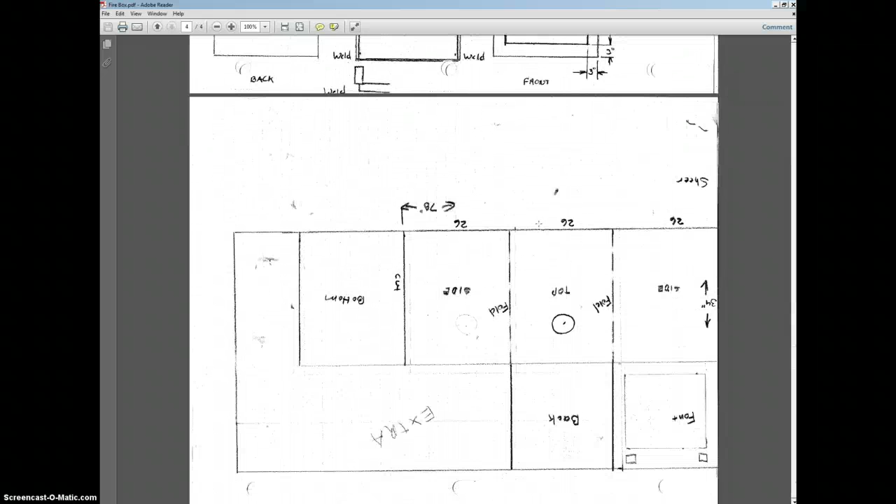For this next project, we're working on a firebox. This is something that we're making in the welding shop this year. And these are some plans that the teacher drew up. And so we're going to take these, make them into a little easier to read files, and use the geometry from a 3D model to help lay out and figure out where things need to be placed for the drawing

files. So there's some different pieces here. It's welded together. There's multiple things going on. So this is going to be a good project for introducing you to welding symbols and also for creating components inside of assembly files. Alright, so now that you know kind of what this looks like and what we're looking at, let's start to build.

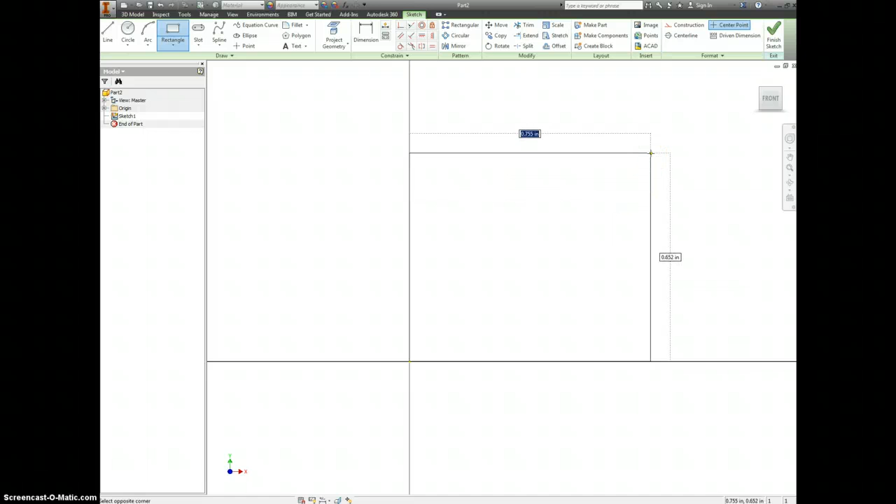We'll make the firebox first, and it's 22 by 22 by 28, and this is all 1/8 inch steel. So I'm going to drag that off to my other screen so I can see it and talk you through what I'm doing and why. So let's go to our part file. And we're making a 2D sketch. And remember, always start with your origin. We said this is going to be 22 inches by 22 inches. So we end up with a rectangle.

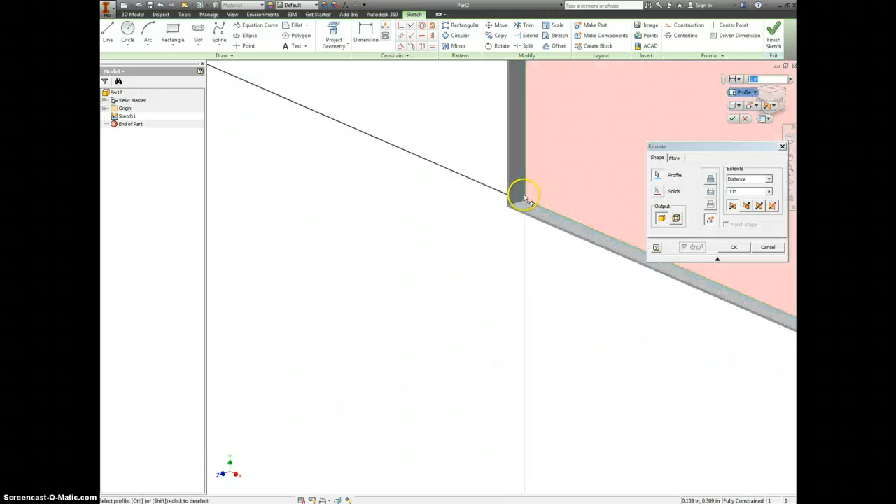So this is 1/8 inch steel, so let's offset that inside. We want these to be the finished dimensions. Alright, so the inside of the box is going to be thinner. So 1/8 inch is 0.125. We're going to extrude just that part, and it's going to be 28 inches long. Okay, easy enough so far.

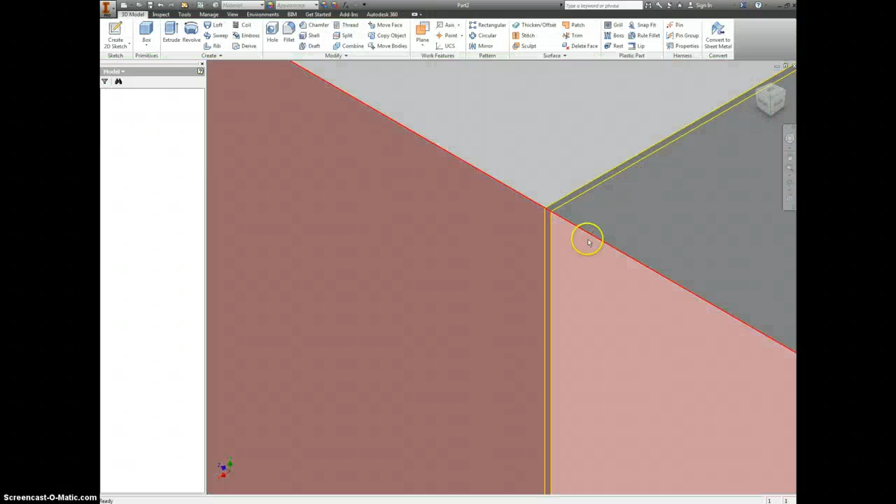We're going to put a back on this. So let's actually flip around to the back side. Right click, make a new sketch. Finish your sketch. And we're going to extrude this 0.125. We want it to go in instead of out, so flip your arrow around. It's still adding material, so that's good. Alright, now we're left with just a box.

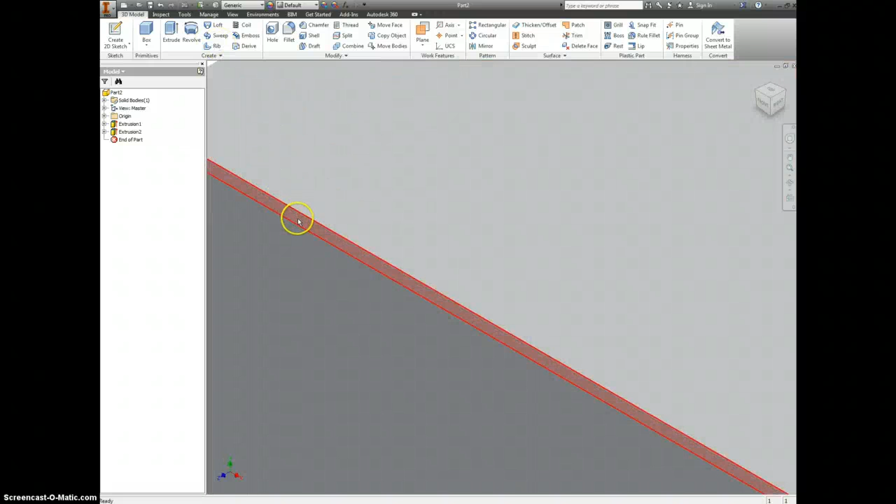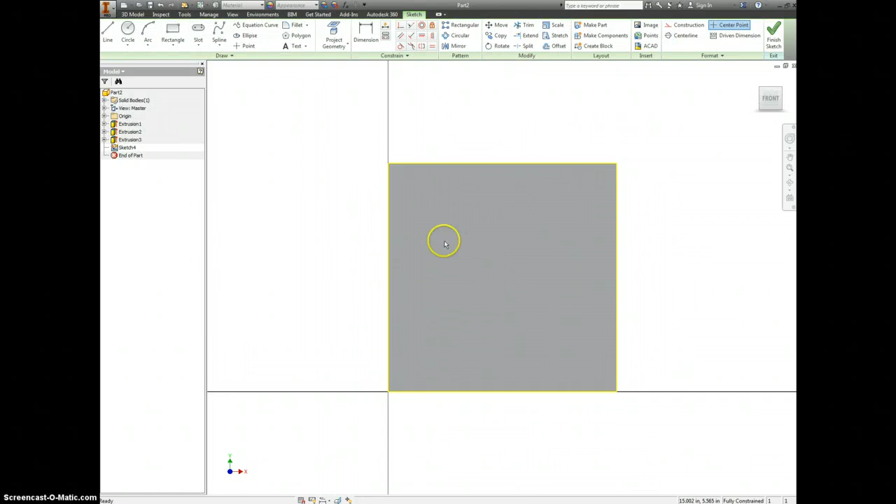Okay, the box does have a front face on it as well. Let's finish that and extrude 0.125. We want it to be pushed in instead of out. Now this is completely hollow. Alright, on the front of this, we want to make a new sketch. It's going to have like a little flange here for the door. I can show you that on the picture as well. So this is what we're looking at now.

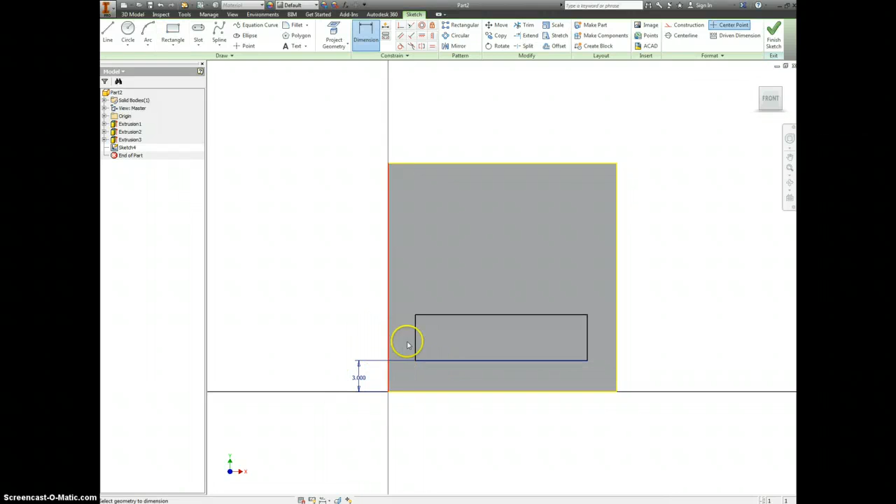It says it's going to be 3 inches off from the bottom, 3 inches over from the side, and that's going to be on either side. So there's our 3. There's another 3, and 3 from this side as well. I should probably zoom in to check and make sure that I'm getting the correct line to dimension to. And maybe you should as well. Let's make sure you're going to the outside line and not to anything else.

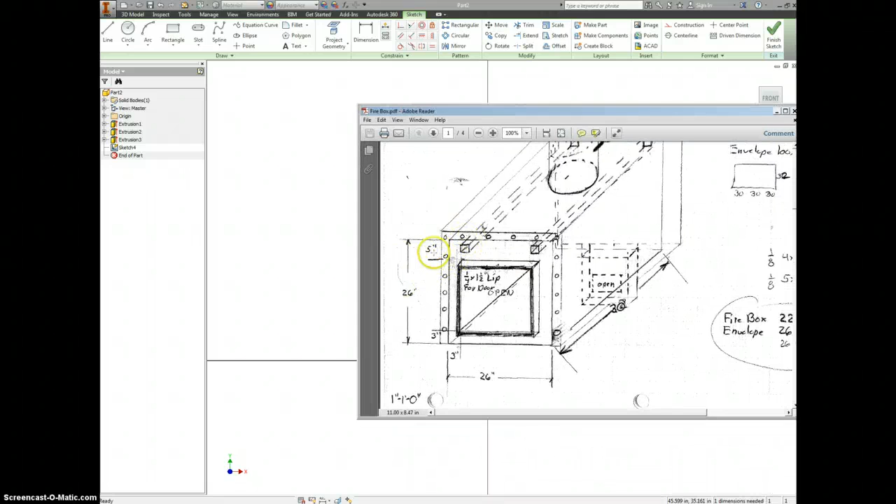Alright, and it says that the height of this is actually rather large. Oop, I had a dimension selected. We should be able to just click and drag this rectangle up. And just going off these dimensions, it says from here to here is about 5 inches. Alright, we are going to cut that part out. So now we're removing material. Still 1/8 of an inch, that looks good.

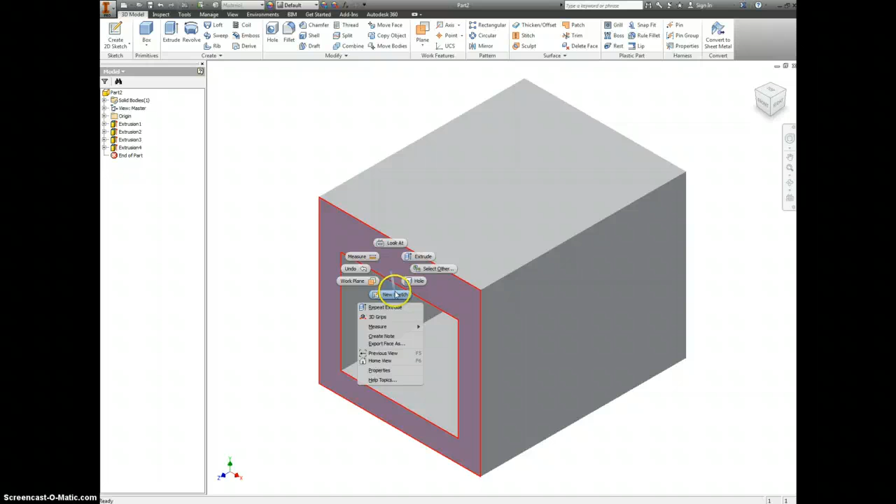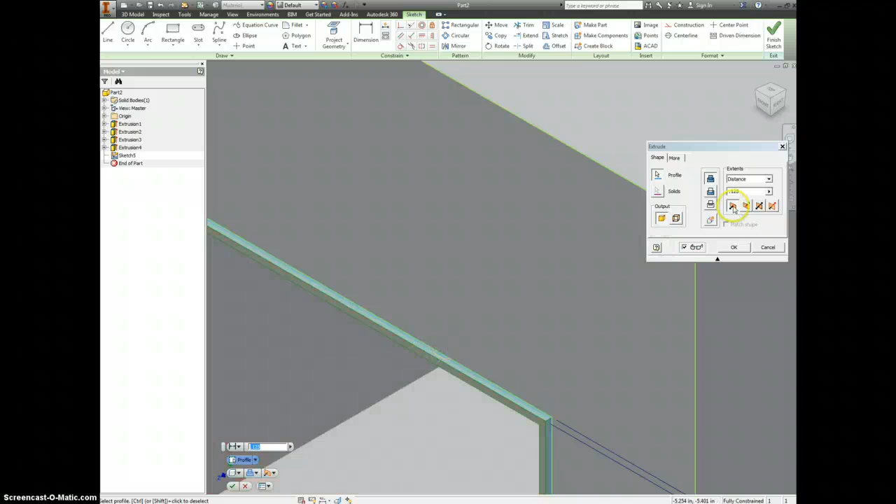And all around this, just to make it more sturdy, we're going to add a little bit of a lip. Okay, so let's offset this to the outside. Oop, can't do that before I dimension. 0.125. Now we should be able to extrude out. And the lip, we're going to have it be about an inch. We might go back and change that later. For now, we'll make it an inch.

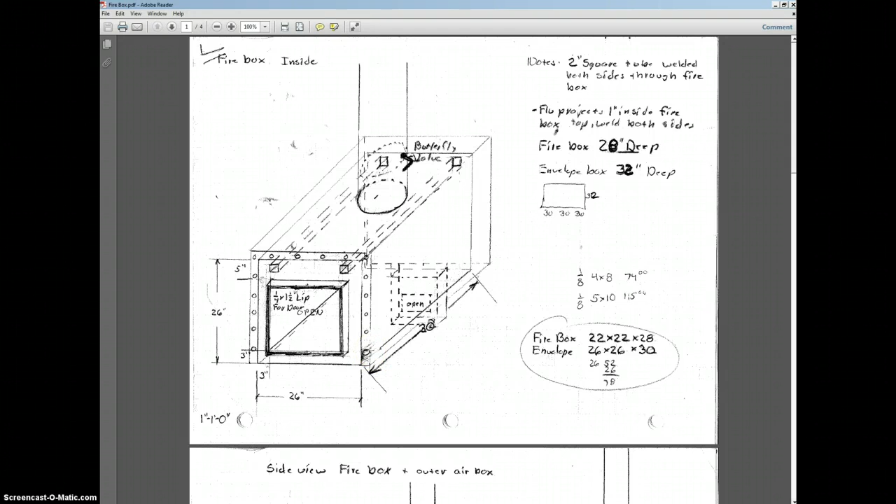Alright, and the way that this whole thing operates, as I should have explained in the beginning, I said this is a firebox. So on this inside part, you have wood that you'd put in here, and you'd start a small fire. There's an envelope all the way around it. It's like a bigger box that goes around it, and the air around it heats up.

This all stays contained, and it ends up that the air around this flows back out into the house or garage or whatever it may be through these little vent holes here and through these tubes that we have cut in through the front face of this. We need to figure out where to place the tubes and the holes later.

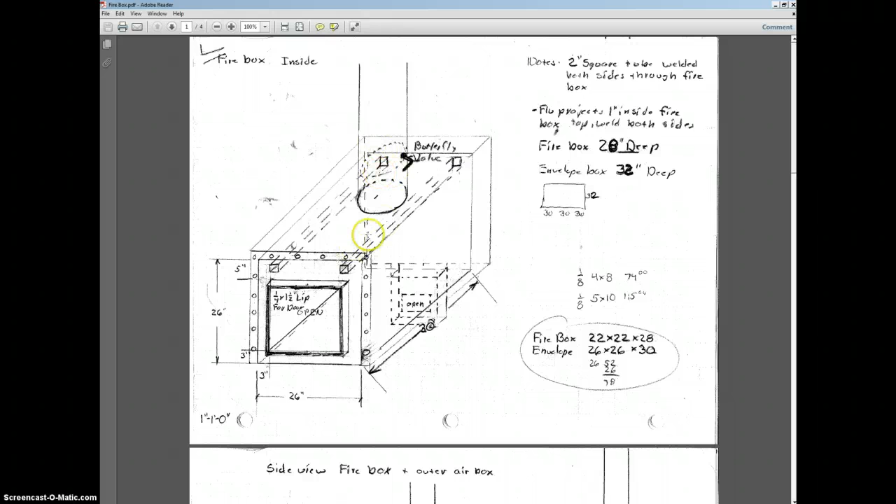We also have the vent stack. So this is cut out into the inside box, the firebox, and that'll take all the smoke and all the contaminants outside, and leave just the clean air coming into the inside. So this has to go through both the envelope and through the firebox. And if we look at the next drawing, it says this is about a foot down, and it's right in the middle, and it's a 6-inch diameter.

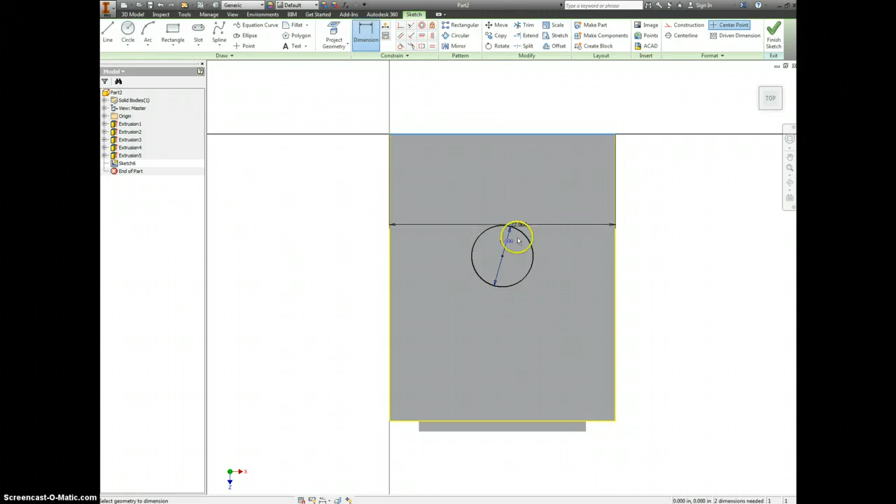Let's make a new sketch. 6-inch diameter. There to there should be 1 foot. Ooh, that'd be 12 inches, right? Okay. And this whole thing was 22, so 11 inches over sounds good. We'll remove that part as well. So we're cutting 0.125. Okay. The last thing, no. That's it for this one. For now.

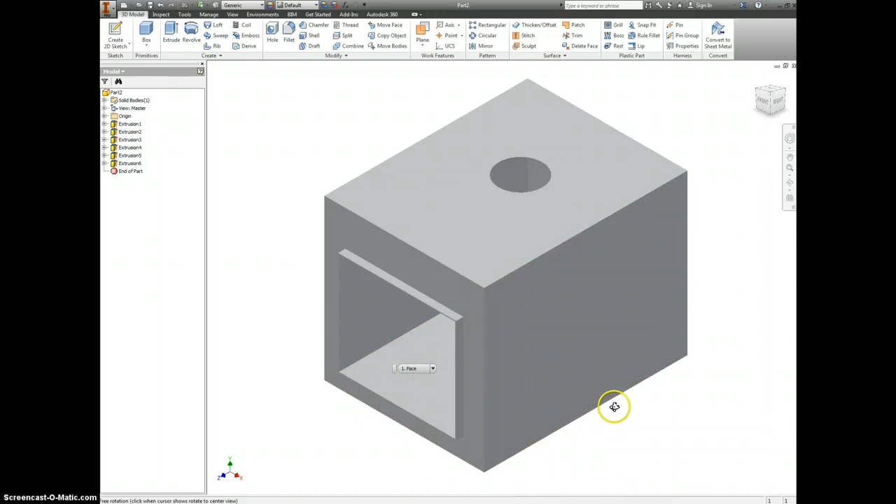So let's save this, and we will call this Firebox. So you may have to make a new folder. I already have one. And yep, for this part you can call it Firebox. Save your work.